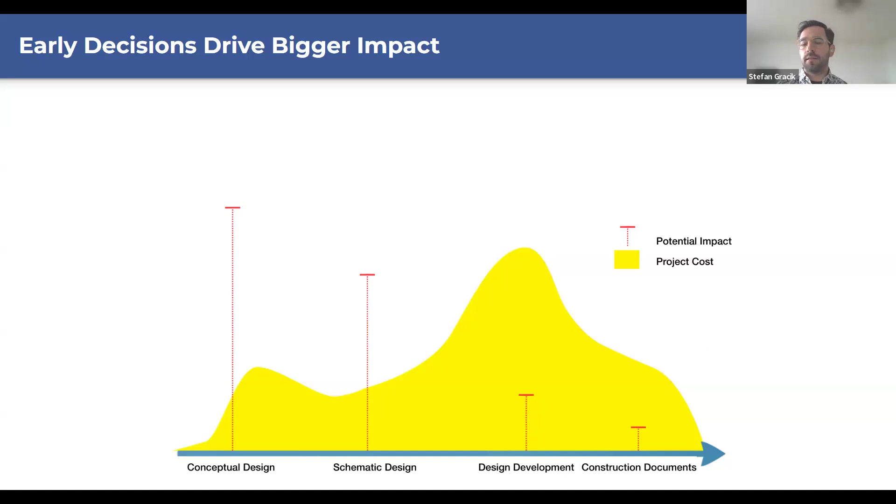Traditionally, a lot of people consider operational to be the part of the carbon sector that's mostly associated with the building, and you can offset that with solar, PV and low energy systems, but it's actually a lot bigger than that. A lot of the carbon that goes into a building is already in the atmosphere before the building's even operating, because of the material production, transportation to the site, and construction process. So at day zero of a building, you've already accounted for the majority of the carbon that goes into it, before it's even operating.

So it's really important to make sure we're accounting for everything and not just this tiny operational scope. Other things teams should be considering, in addition to the operating, are the facade, the structure, the actual materials used in the HVAC system, the size of the PV and battery systems. Also, the lifetime of the components being used is pretty important, because every time you have to maintain and replace equipment, that's more carbon being used for the building.

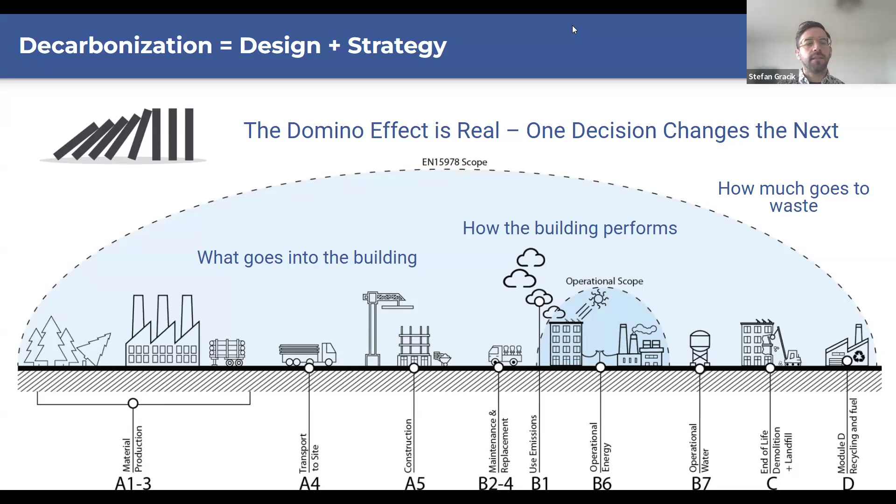Building up strategy and the design progress - getting back to this idea of thinking in a bigger picture about where all the carbon in our buildings is coming from, and also making sure we're trying to think about it earlier in the project, so we have more ability to design these projects the way we want to be.

Doug, I don't know if you have anything to say about how we're trying to push solar and energy storage into earlier parts of design and not just slapping it on at the end in construction documents. I'll just say that it's not really a lesser thing - it's an important piece of the puzzle, and how you do it, where you do it, and how much you put in is the key strategy you've got to figure out. Earlier is better, of course.

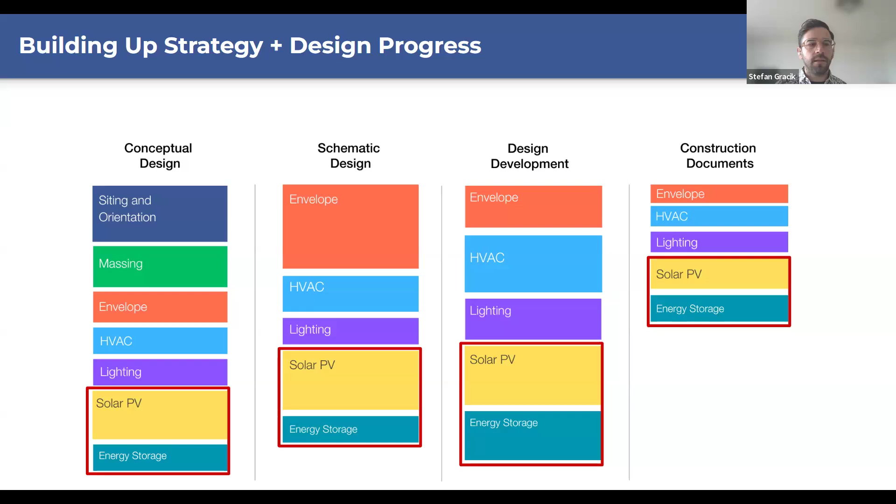Let me start off this slide by saying, let's back up one slide for illustrative purposes. What we want to make a point on here is that although there's a lot of traditional systems looked at in the conceptual design phase, solar PV and energy storage, at least in California and in many other places, is a reality, and it is no less a central part of a building design process than the HVAC system or the windows or anything else. It's a fundamental part of what the carbon strategy for the building will be. In addition, the energy platform you work from is going to drive many decisions down the road, but these are costly and complicated. So now let's go to the slide that I'm going to start on.

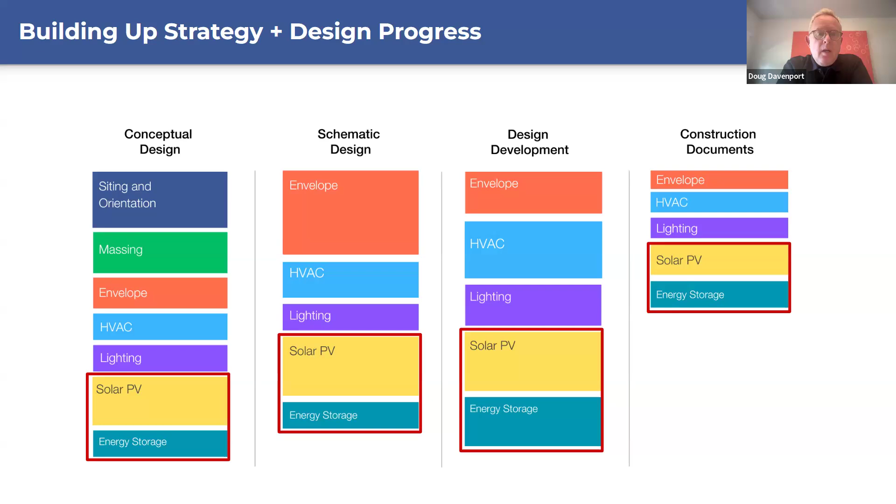Here's what we're recommending. I want to be really clear that we, as a team and as folks who've lived in this world for a long time, are not saying you should scrap your design process and forget everything you've learned. We're not saying what you're doing today is wrong, but we are saying you can take a different approach and achieve really great outcomes.

So things that we feel would be very important—I'm going to have a little discussion with my partners here as we move forward. In conceptual design, while you're looking at all those other systems, really at early stages, work with your client and then also with your project team to set ground rules or targets for embodied carbon and operational carbon. This may lead back to an internal standard, or it might lead to a building performance standard for the building once it's built. Setting all of those objectives up front becomes a frame for the rest of the project. Certainly setting ground rules for how you can employ modeling and other estimations to run through scenario analysis—we're going to be covering that in a second. Having clarity on what the goals are with respect to carbon is incredibly important.

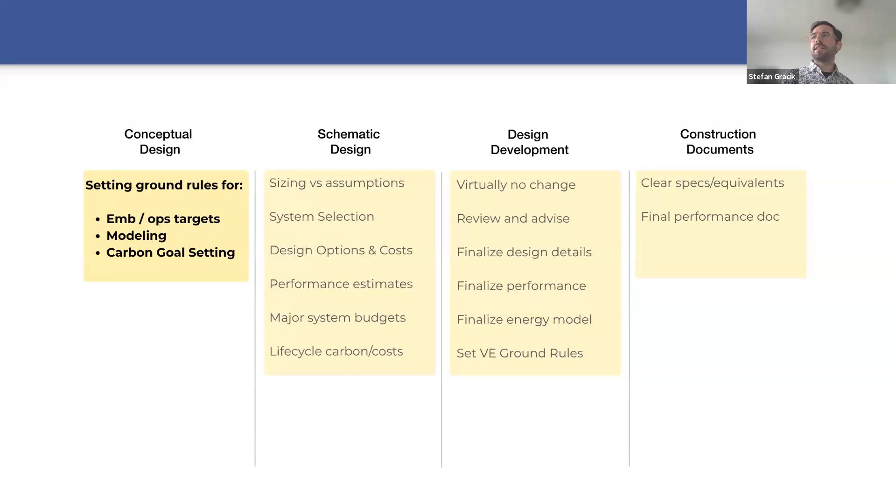Shannon and Stefan nailed it, I think. Starting early on, thinking holistically about decarbonization at the beginning of the project, and setting those goals, is key.

Excellent. Yeah, so I mean your clients are going through a lot. We're seeing ownership go through a lot of challenges, especially with regards to things like building performance standards and other regulation.

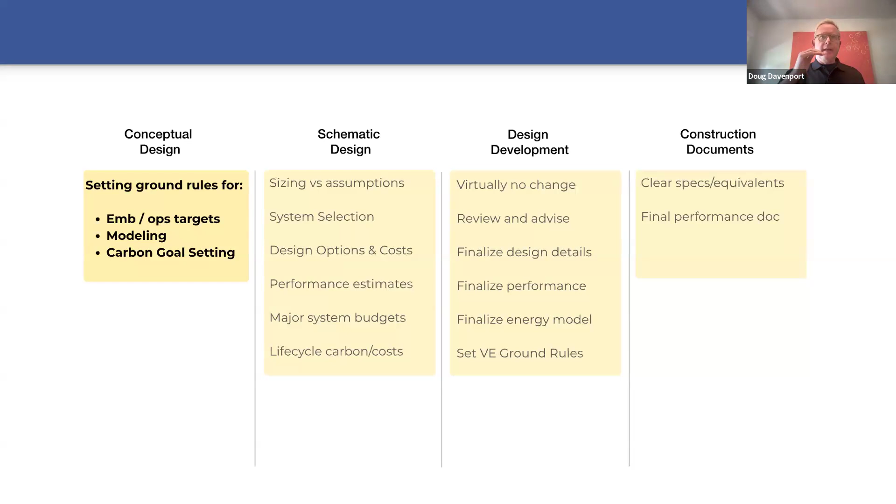But there's also the fact that, frankly, just now the economics of the sustainable choices become far more complex. It's best to get everybody out onto the table and figure out what direction you're going to be going.

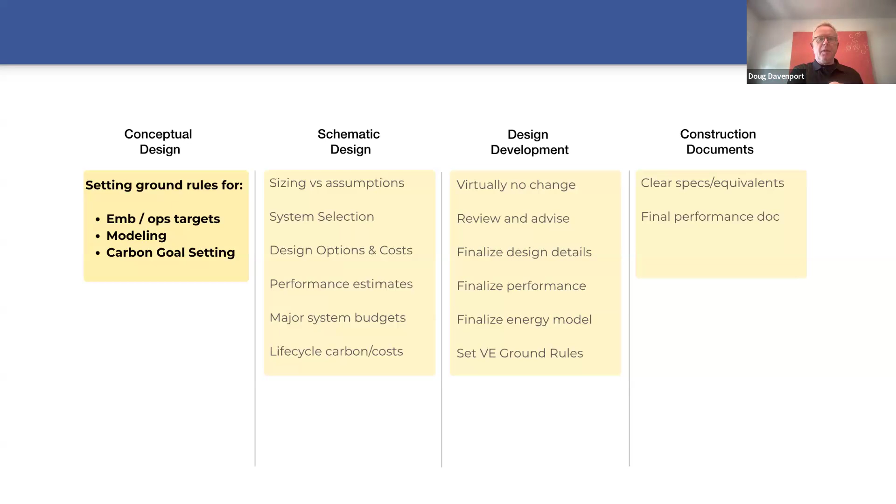So if we just go through these, and yes, you could read the faint versions. We're not trying to hide anything, but let's go to the next set real quick.

Based on what you know from the beginning, I'll also say, folks, that we're going to be going through a project where this was done and it did work very well. Now, because you've gone through and been able to get to the notional targets and options you should be considering, you can get into things like sizing, system selection, and major budgets, and start to tie together the building systems, their costs, possibly even their long-term costs, and then look at issues like life cycle carbon, especially with regard to embodied carbon.

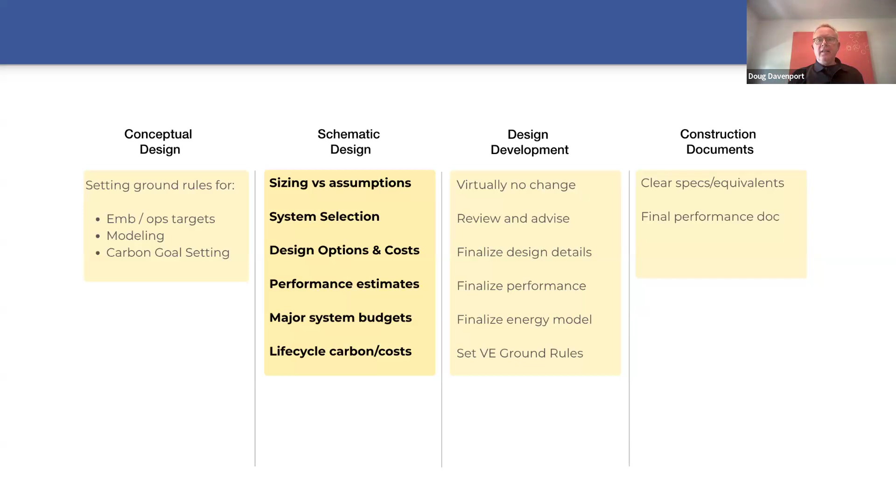Design development. Any comments from anybody from my partners on the schematic design? I think we've pretty much said it there, right? Yeah, okay, good. Design development, again, now it's starting to become much more like a building project that we all know and love.

Because we've now steered things in the direction that we feel it needs to go, now you're in classic design development with one thing we'd like to discuss real quick because it's really important, and that is we really encourage that there are ground rules, especially with your client, with the decision makers, with regards to value engineering before it goes out on the street.

I've been in this business for a very long time, so have my partners in this. I'm sure we all have stories of how a really great idea died an early death because value engineering took it out of the picture. This is a real problem when it comes to these kinds of projects, and we need to be extremely careful about that. We could do a whole webinar on why VE happens.

But I did want to open up to my partners. Are there any points you'd like to make about value engineering when it comes to projects like electrification and such? I think just like, sorry, go ahead, Shannon. Yeah, you can go first again.

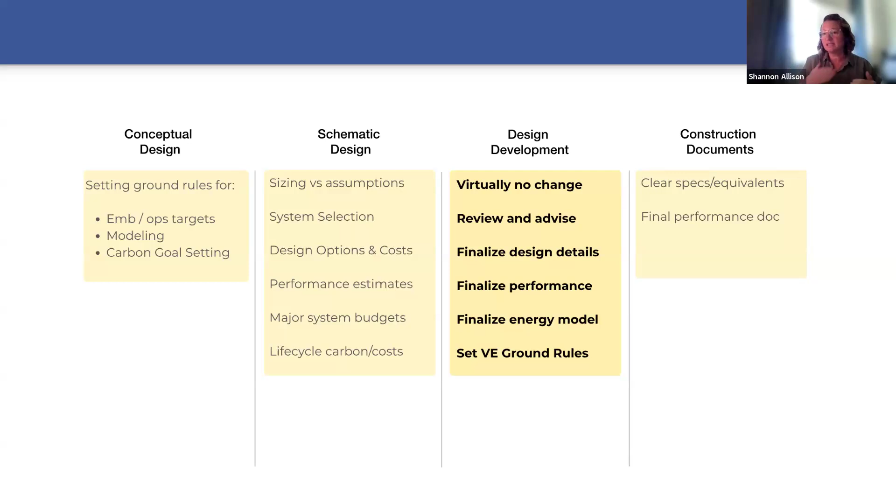I think thinking about the possibility of VE during the earlier phases is really important. And I've seen some architects, when they lead that process, they already have like a list that they're going to throw out there so that they can keep the things that they want in the project.

Go ahead, Stefan. Excellent. Yeah, I think this is why setting those targets in conceptual design is so important, because it kind of puts everybody on the same page about what the goal is for the project. And then when you start VEing, you can literally just analyze, okay, if we make this change, how does that affect things? Are we still going to meet our target?

And I've been on projects that did great through the VE process because we were able to analyze, oh, hey, this is actually a good cost savings measure. It doesn't kill our target, it saves some money, let's do it. And then another one is like, no, this is going to blow us out of the water energy-wise. So just making informed decisions is important.

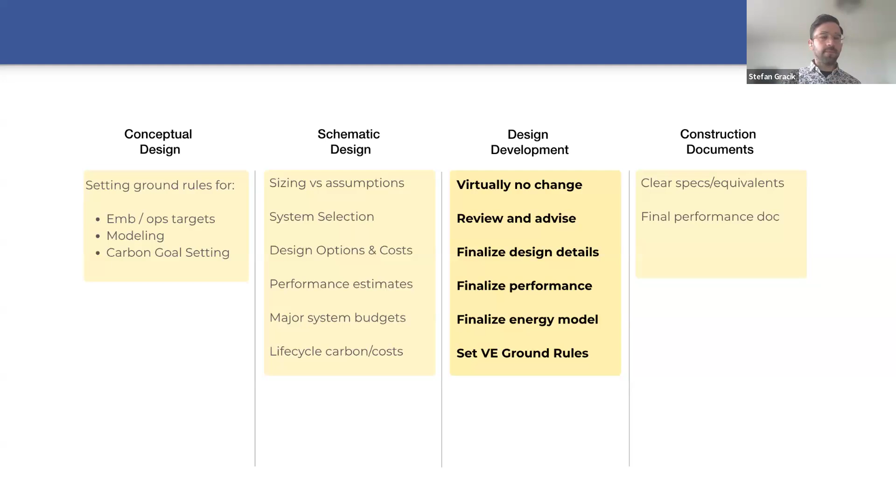Excellent. So in the interest of time, you get to construction documents. The whole goal here is everything you dreamed of in the beginning, and you set your aspirations toward, and you felt was the best idea, shows up here, right? That's the whole idea. And the next step is to make sure it actually shows up in the ground.

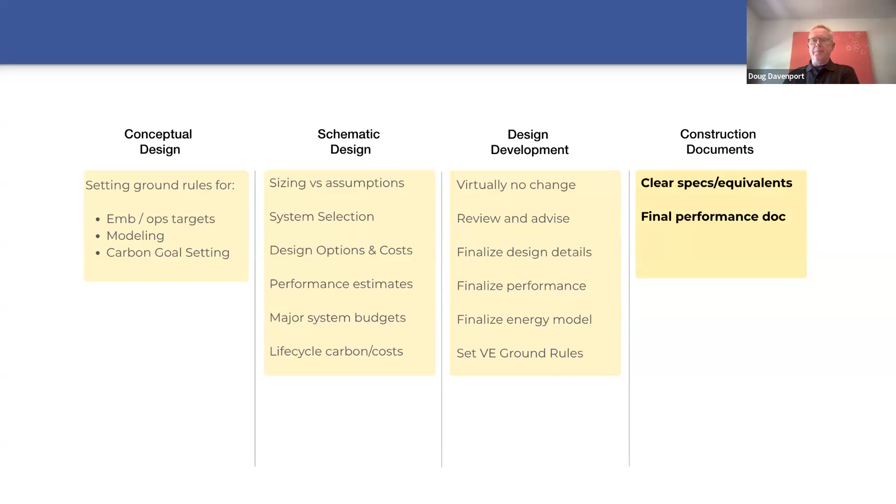Let's move forward, so keep that framework in mind. We are going to be bringing it back, and we will be referring to that as we move forward. Stefan, I think you've got the next section.

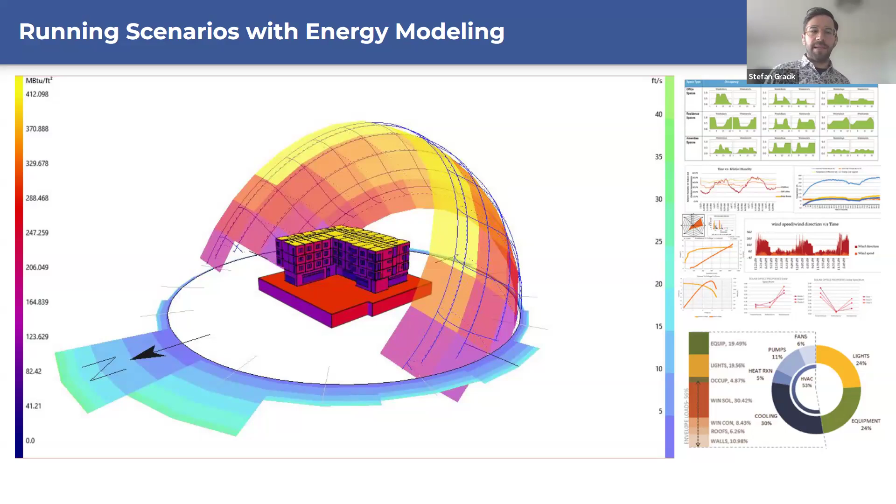But we can go to the next slide now.

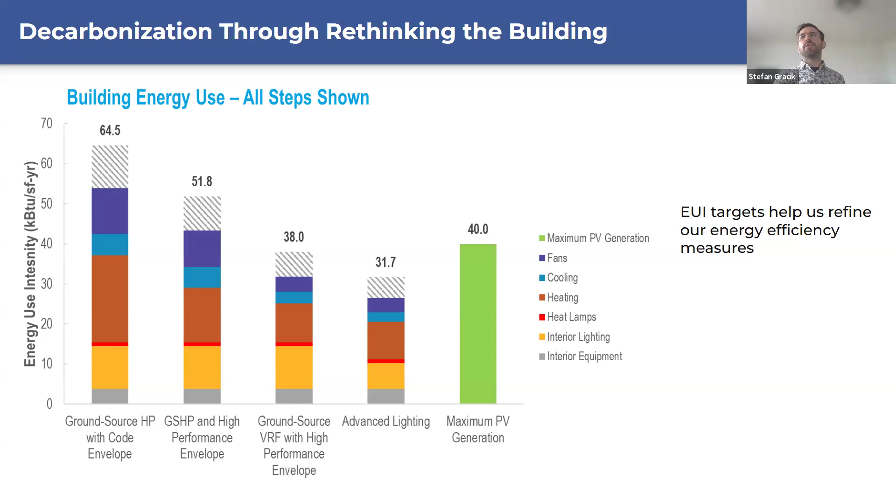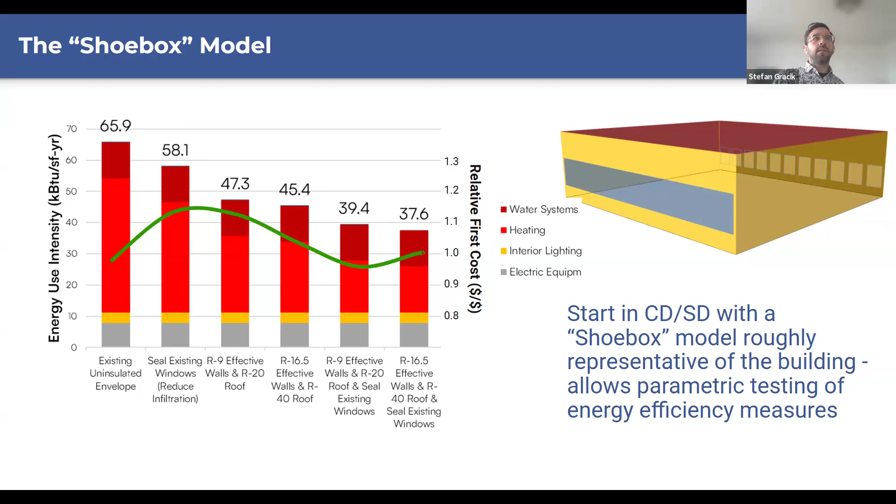So squeezing performance from existing buildings. I'm making a case for focusing on the envelope, especially in early buildings. The envelope has huge implications both for embodied carbon and for operational carbon. Part of the reason envelope is so powerful for embodied carbon is that if you have a better envelope, you can actually shrink your HVAC system, and HVAC systems have a lot of embodied carbon.

HVAC systems are made of metal, which is carbon intensive to build, and they have refrigerant with global warming potential that leaks out. So smaller systems, picking a system with less refrigerant, can be a great way to reduce embodied carbon. Envelope components also last longer compared to HVAC systems - putting more money into your envelope means it doesn't need replaced as often, assuming you're getting good stuff. So that's an improvement for life cycle carbon.

In coastal California, we have a great climate too. As you'll see in our Indio project, the envelope reduces the amount you need to use your HVAC system quite a bit, because there's a lot of natural ventilation and night flushing techniques that can be used to not even use your HVAC system. So focusing on envelope can pay off in dividends in many different ways, operationally and through embodied carbon.

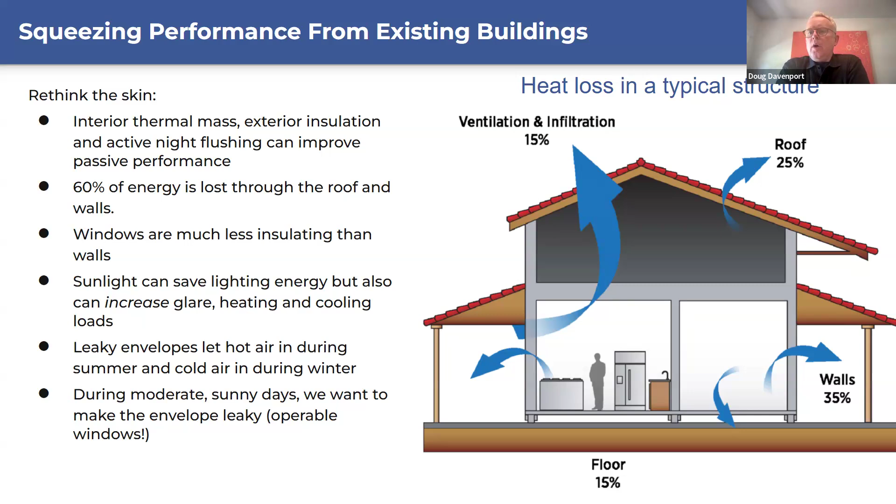Stefan, I wanted to interrupt because there was a question very topical to the slide just before, by one of our students, Charlie Boyd: Why with BIM and other known modeled assemblies does energy models still use simplified representative 3D models? I think what he's asking is, can't we do this better? But I think the point is you're trying to do it faster and get to smart strategies, not necessarily define the details. Yeah, exactly. That can be a really technical question too - we could do a whole hour on that question alone.

There's a lot of physics and heat transfer calculations happening in the background, and to make sense of a Revit model for those calculations would be very, very difficult. But there are people working on automating the simplification of a Revit model into an energy model. It's called Ladybug Tools - they have the best working one I've seen so far. They're letting the computer do the tracing of all the walls and automating that, so it's faster. But there's real technical limitations for why we can't just use a Revit model for an energy model - it just doesn't have the information we need.

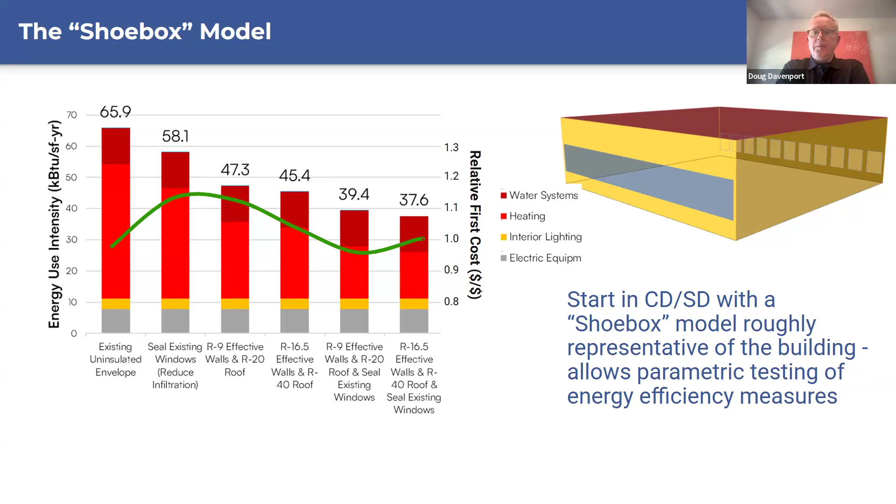Plus, it would be incredibly expensive and slow to get the very quick answers we're trying to get to at the conceptual stage. Yeah, also true. Okay, thank you. If you could skip forward. Sorry about that. Yeah, we can go to the next slide.

Charlie said too - here's a great example of other benefits of focusing on envelope, focusing on passive strategies when you're looking to make low carbon buildings. So buildings with poor envelopes are tough for the electric grid.

Both of these buildings were modeled to be zero net energy, so they have PV systems offsetting all the energy use in a year. But even with zero net energy, a code minimum building requires a lot more PV, so whenever PV is producing a lot it's way overproducing, and at night you're way underproducing because you don't have any renewables. So there's just a lot more peakiness happening, which makes the duck curve, as David will talk about later, a lot worse.

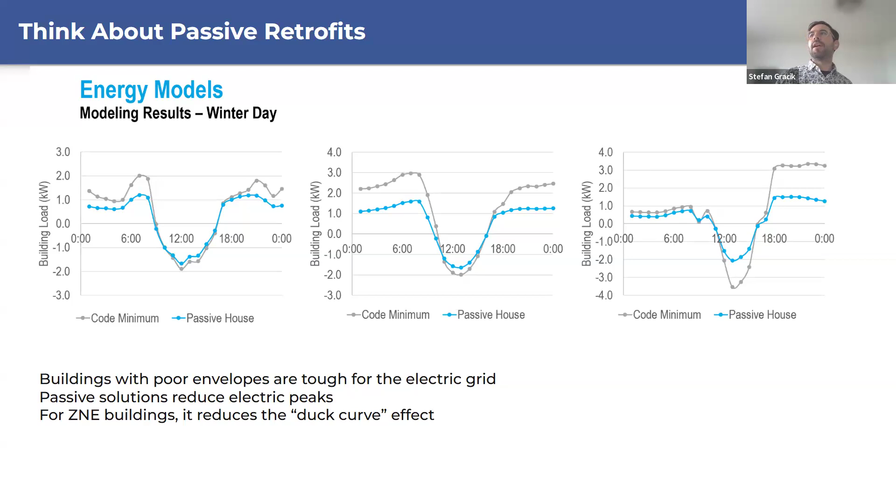So building more passive allows you to have lower peak demand on your building. It allows you to have a smaller PV battery system, which makes your electric use less peaky, which is great for the grid. It also allows you to have less embodied carbon, because PV battery systems have a pretty good amount of embodied carbon associated with them. We love them, but we want to make them smaller if we can, right?

Seeking out embodied carbon reductions. So embodied carbon is huge. This figure is from MEP 2040, the study they just came out with a couple months ago. On day zero, before your building's even operating, there's a ton of embodied carbon impacts on the building. MEP systems are already using 27% of embodied carbon on a typical building from day zero. So it's maybe a lot more than most people think of embodied carbon as a structural or envelope thing, but actually MEP systems with their metal and refrigerants use a lot of embodied carbon on day zero.

And then their embodied carbon increases quite a bit over time because they have things like equipment replacement and refrigerant leakage. So, 20 years into the building, the MEP system is now responsible for 53% of just the embodied carbon of the building.

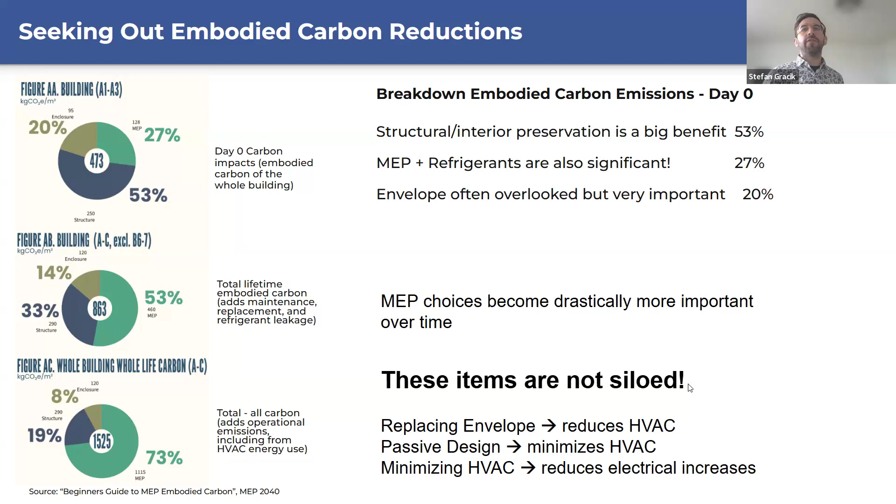And then when you consider the fact that HVAC systems are the highest energy using piece of a building, once you get to the entire whole building life cycle of carbon, including all embodied and all operational carbon, MEP systems can be said to account for 73% of a building's total carbon, right?

And the thing is, we don't always have to focus on MEP to reduce MEP, because having a better envelope reduces your HVAC size and reduces the amount it runs. So these things are all kind of linked together, which is why it's so important for us to look at the whole carbon picture as a team and not siloed.

And Stefan, we're going to have to kind of turbo the next two slides to get us into timing, because we want to have plenty of time for open discussion. Yeah, sorry about that. No worries, so much great stuff to talk about. We go to the next slide, Q. We're always ambitious when we do these sessions.

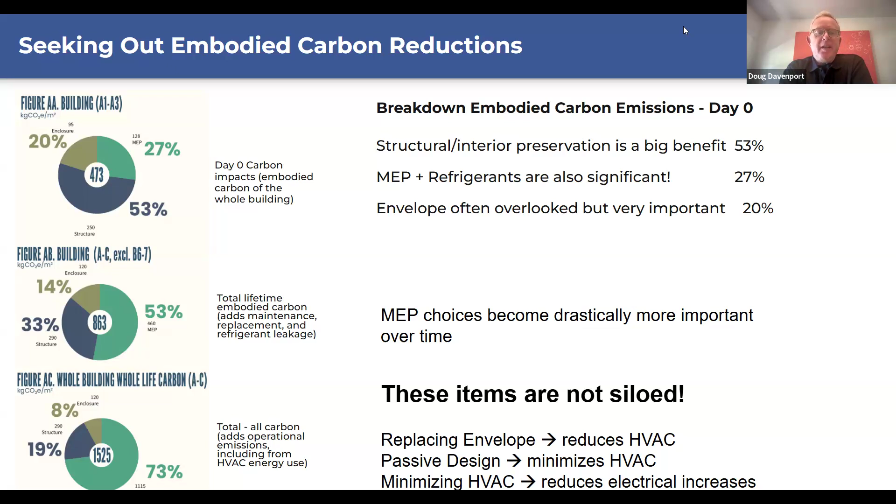So anyway, what do we recommend? Every client has their own capability. Some clients have all the money in the world and want to do everything they can, but some don't. And sometimes you go to a building and there's just genuine issues, like it's crazy uncomfortable because they don't have any insulation, they don't have an HVAC system, there's glare, they don't have enough electrical capacity to put in this new heat pump system they want, or something like that.

So I think every project that's a retrofit, and we're going to have a lot more retrofits than new buildings in the future to meet our carbon goals, should first diagnose the existing issues. Just walk through the building, figure out what's going on, because sometimes maybe they don't need a fancy new HVAC system. Maybe they just need their operable windows to work properly. Maybe they're stuck closed or something like that.

Second, reuse and adapt what is there. So before you go out and buy a bunch of fancy equipment, maybe consider making passive upgrades to the building, because a lot of times these cost trade-offs can be positive. It could be better to make a building work passively, especially in coastal California, than to go out and buy fancy new HVAC systems.

And then for what remains, once we get those first two underway, that's when we want to start eliminating natural gas, putting in all-electric HVAC systems, and getting in PV and battery systems.

And then for the clients that have the money, everybody's going to have to do this eventually, but we should do it in stages because those PV and battery systems and electric HVAC systems will be smaller for projects that have gone through the first two issues already.

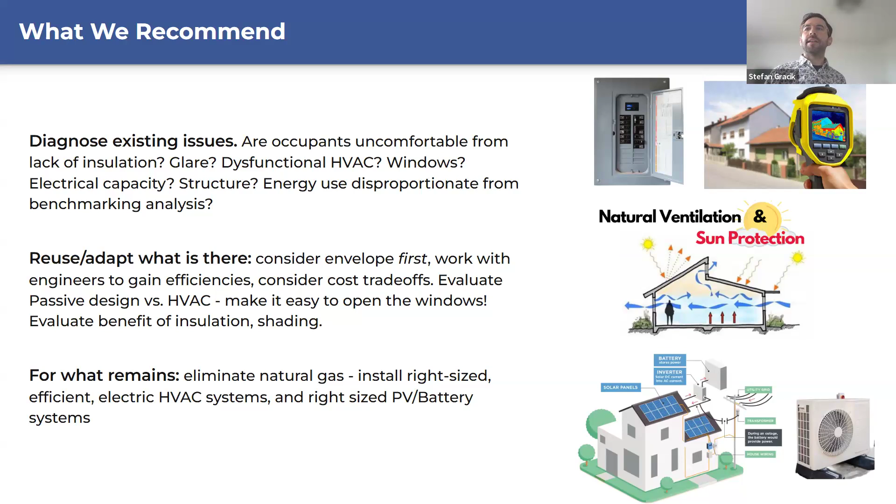So, to me, this was really exciting because an investment in envelope carried us further toward the goal than investing in air conditioning to essentially work against a bad envelope.

Exactly. And the economics are very appealing to the owner.

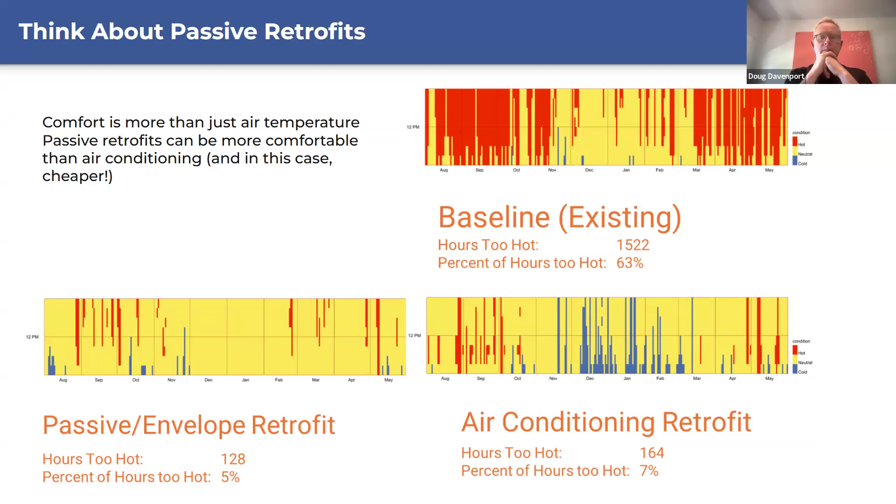So I'm going to talk about some of the issues on the electrical side. I think the first thing is, one of the key strategies if we're going to all-electric buildings using carbon-free electric energy, is storage is becoming a big thing.

The good news is that the cost of storage, similar to the cost of photovoltaics over the years, has been dropping. Years ago, I remember doing my first net zero project and PV was like $10 a watt installed. Now it's less than $2 a watt installed in a lot of cases. So batteries, because of EVs, are following that same curve and the cost is going down, which is key. Over time, they're getting more and more affordable.

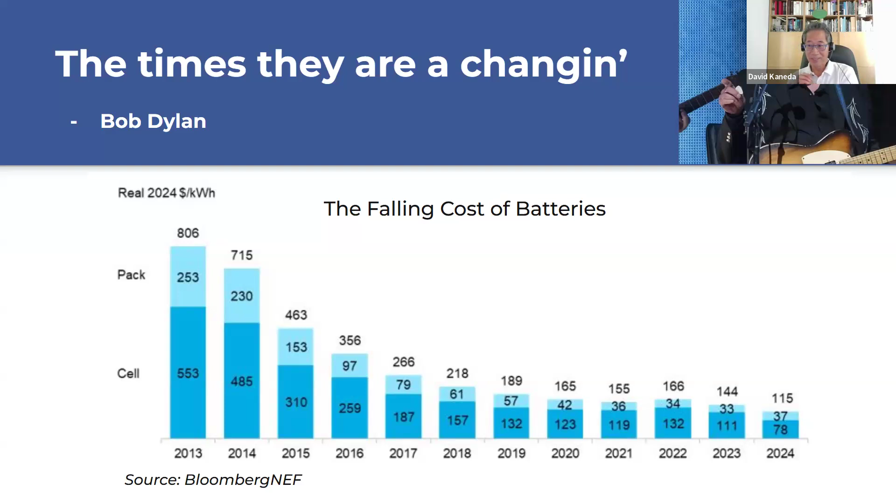A key thing I want to talk about is converting all your gas-fired equipment to electric - clothes dryers to heat pump clothes dryers, water heaters, gas cooktops to induction, and heat pump heating, eventually electric vehicles, and even potentially changing fireplaces to something like an ethanol fireplace.

There's actually an interesting fireplace somebody's making that uses steam to create something that looks like a flame.

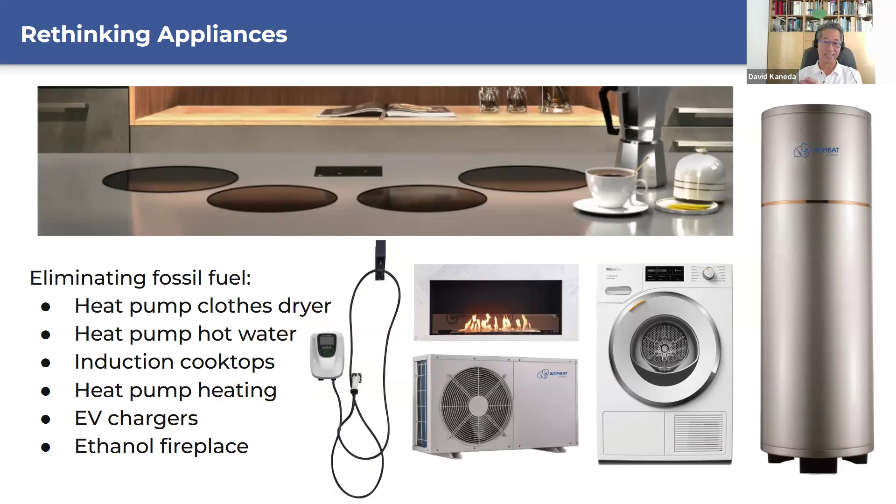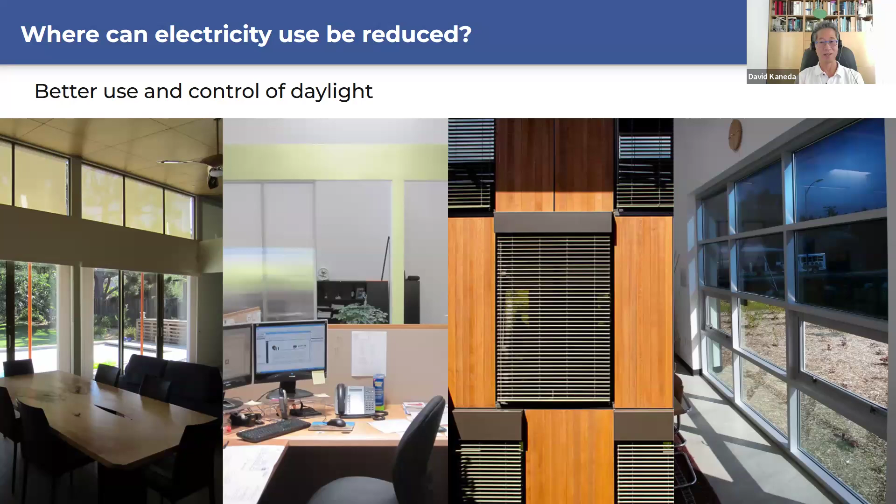A huge issue on the architectural side, underappreciated and not always done well, is daylighting. Architects have been aware of daylighting for years, but it actually takes a lot of expertise to do it well, and having a daylighting expert is important. You can save a lot of energy because you don't have to use electric lights during the day. But if done poorly, you could use more energy because you're overheating a building with more window area, creating a need for more electric heating in the winter.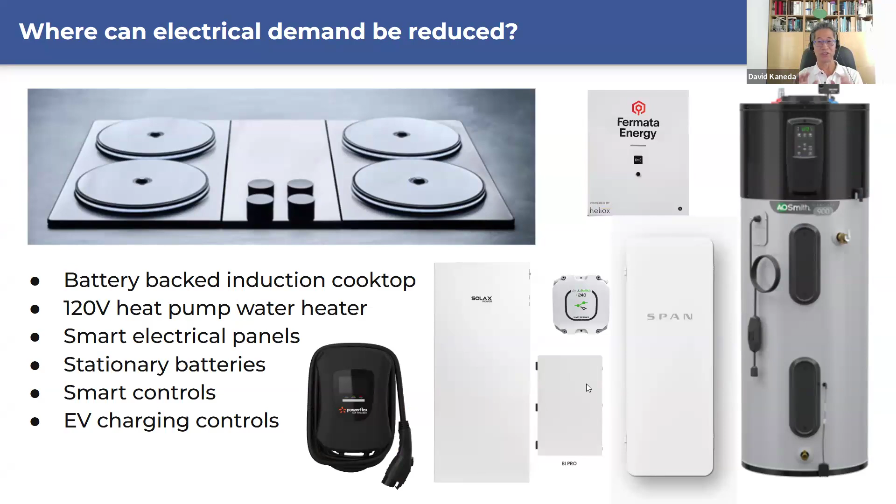Another issue is how do you reduce not the energy use, but the peak demand? Especially if you're electrifying existing buildings, you already have an incoming service, and as you start adding electric equipment to replace gas-fired equipment, the electric loads go up, and in a lot of cases you can overload your service.

Getting a new service often creates a time delay in the project. Sometimes you can't even get an increased service, and the other issue is that you need increased wire sizes and to rewire things. So there's starting to be a lot of really interesting equipment out there to help you put in this electric equipment without significantly increasing the demand in the building.

Some you may have heard of, like there's a couple companies making induction cooktops - typically you need a 40 or 60 amp breaker to feed them. But there's companies making induction cooktops you could plug into a 120 volt outlet and they work just fine. They do it by having batteries built in, so when you use more than one burner and the load goes up, the batteries kick in to supply the extra power, and when you're done cooking, the batteries recharge.

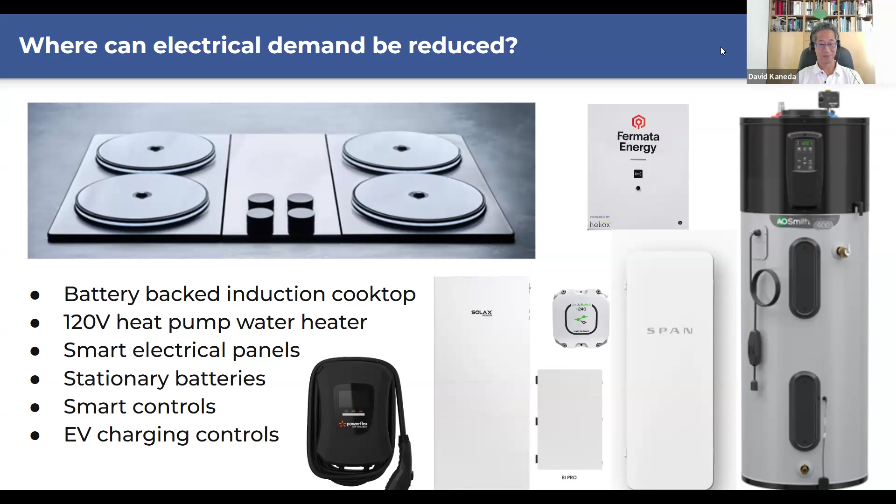That's an area to watch, and to have your engineers watch, is what's going on in those areas.

There's an interesting product that our team's been working with that takes heat pumps and does some smart things that probably we should have been doing all along, but haven't.

Think about a refrigerator - it's actually a type of heat pump, taking heat out of the inside and dumping it into your house. In the summer, you're taking heat out of the refrigerator, dumping it into your kitchen, then taking heat out of the kitchen with an air conditioner and dumping it outside. If you think about it, that's pretty wasteful because you're using two pieces of equipment to get the heat out.

What if you could just take it all the way out of the building in one go? Or better yet, what if you could take that heat out of the refrigerator and use it to make hot water? Right now, you're using one process and getting results of both cooling the refrigerator and creating hot water.

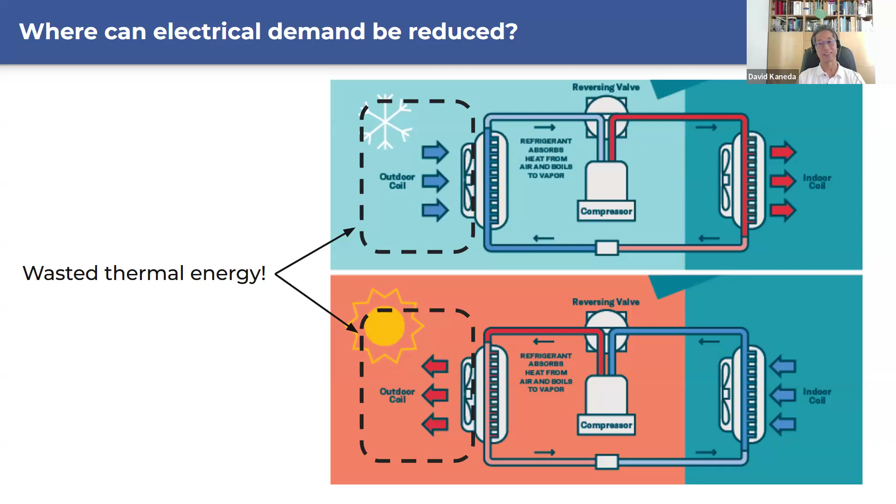I'll just mention that Flow Environmental Systems is a partner of Prospect Silicon Valley, and David is part of these projects and closely tied to our organization. We'll put a link in the chat to two really important demonstration projects we're using with Flow, with a single heat pump providing hot water heating and cooling, hydronic cooling. It's really cool, we'll put that in the chat.

I think most people have heard this - it was in the news last year that California reached 100% renewable energy for 132 days. So I think lots of people are starting to think we have plenty of renewable energy, we're in good shape, we're well along the way, right? And that seems to make sense, right?

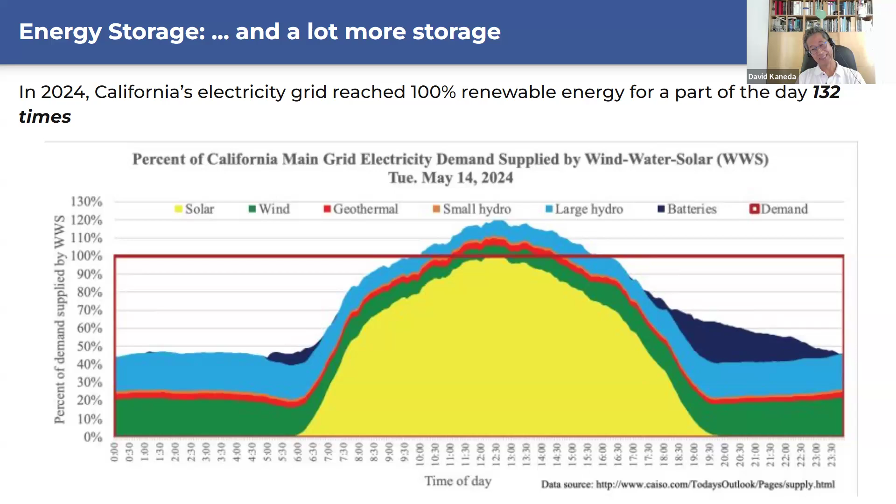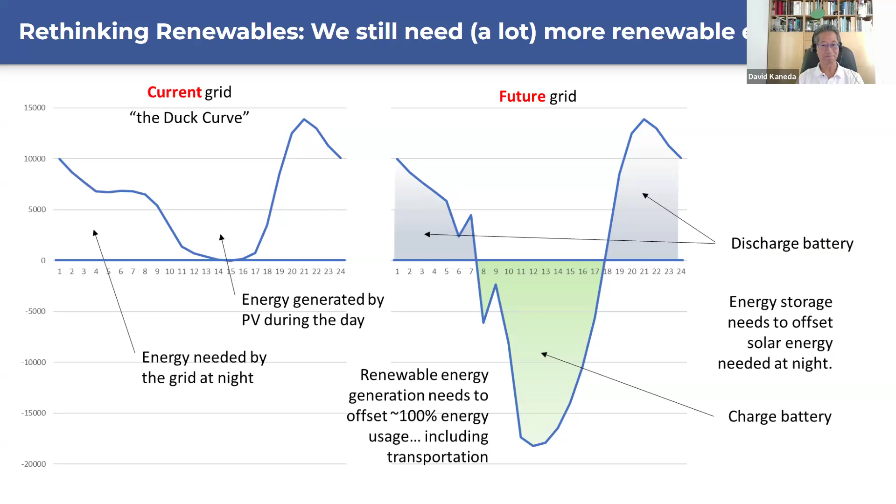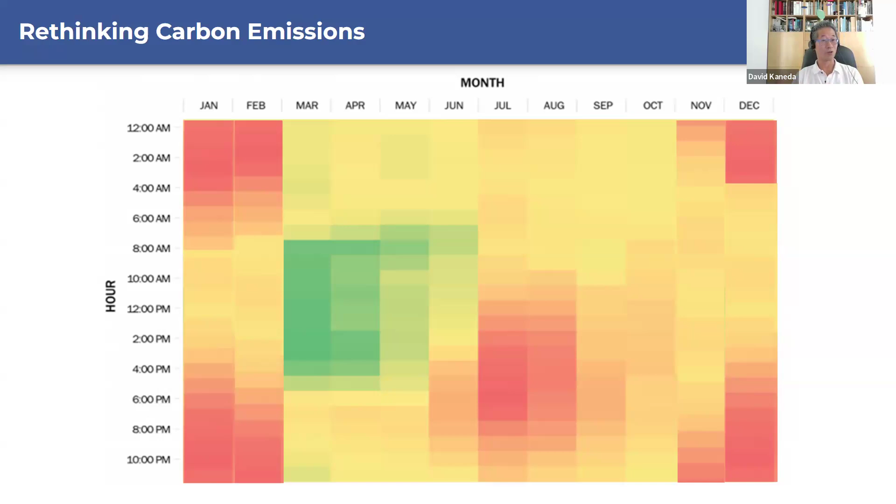So that's something, at least for our whole industry, to be considering. How do we solve that problem? Next slide.

So one thing I think we're looking at is putting PV on buildings and batteries in buildings. It's becoming a code requirement, and I think the requirements will become more stringent over time. Next slide.

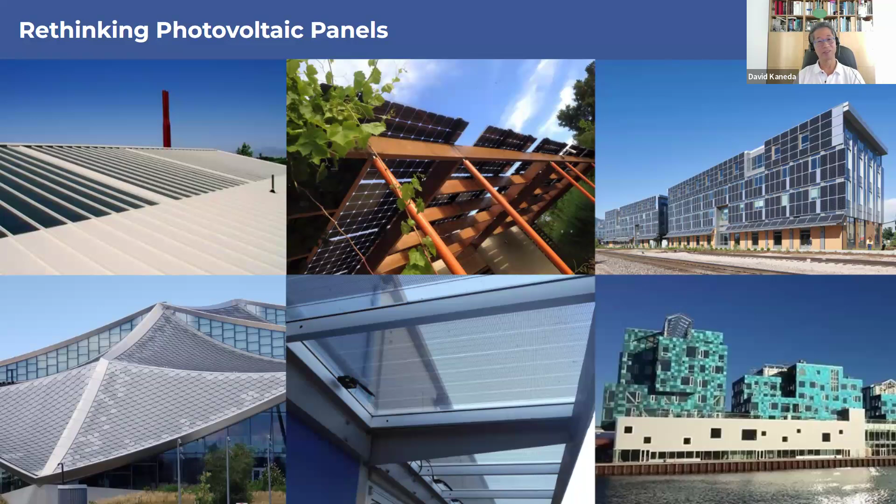So the good news for architects is there's a lot of different ways that photovoltaics can be incorporated into buildings, so you can get very creative with them, both in the roof and on top of buildings, but also even in facades. And it's been done both in the US and in Europe.

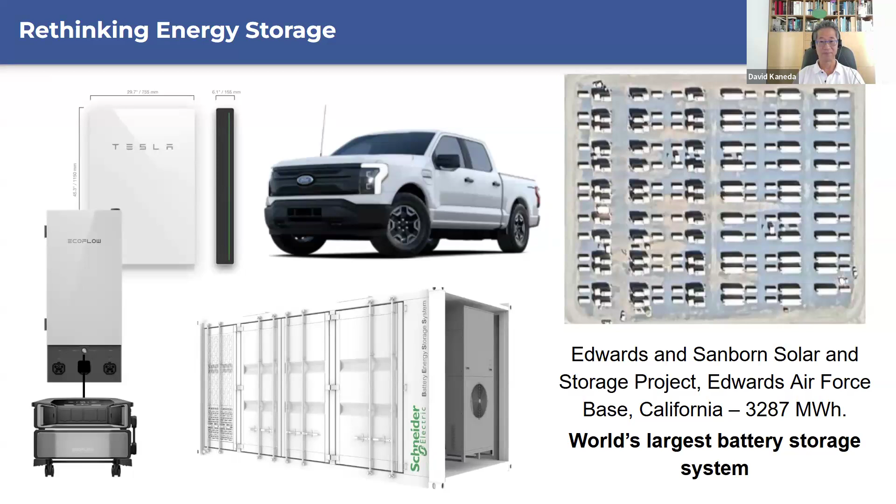And then, next slide. We're already starting to see large batteries being installed in buildings. So this is a project I worked on recently that had 1.4 megawatts of PV, but interestingly enough, it also had 2.5 megawatts and 5.3 megawatt hours of batteries, to create a microgrid that this campus could use in case power went out, and also to support it to be able to store power and use it later on in the day. Next slide.

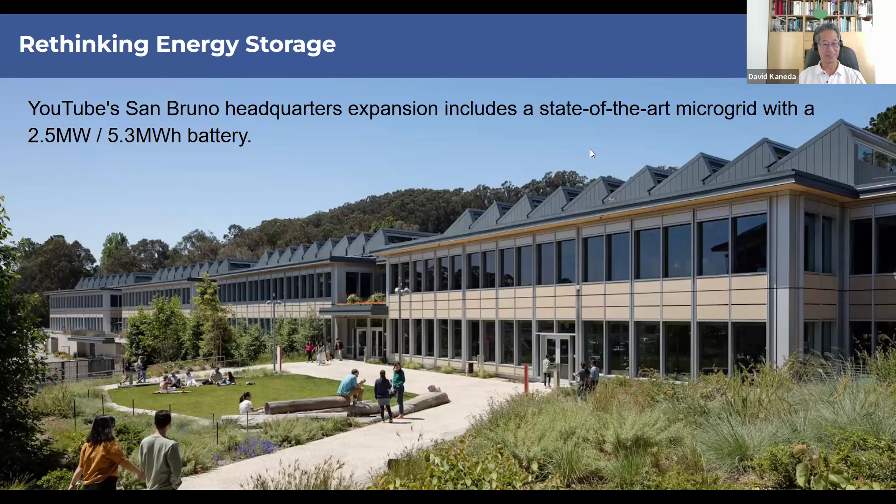Shannon, I think this is you, right? Yes, this is me. So I'm going to cover the 435 Indio Way project, which was previously mentioned.

About 10 years ago, at the firm that Dave, Stefan, and I previously worked at, we worked on this renovation project of a 30,000 square foot renovation of a 1970s concrete tilt-up single-story commercial office building, which is a common building type throughout the Bay Area and especially in the South Bay.

The building had uninsulated concrete walls, really thick concrete walls, concrete floor, wood roof, and single pane windows. The goal of the project was to see if we could renovate the building to be net zero on a developer budget. Our first task was to set the maximum energy budget based on the roof square footage. It could be site square footage too if you're going to put in overhangs, but we looked at iterations of that too for PV production and decided the roof was the best bang for the buck.

So then once we had our energy budget, we worked toward that budget by breaking it down into the different components, which you can see in these two charts here. And then you whittle down the different components where you can to try to hit that energy budget.

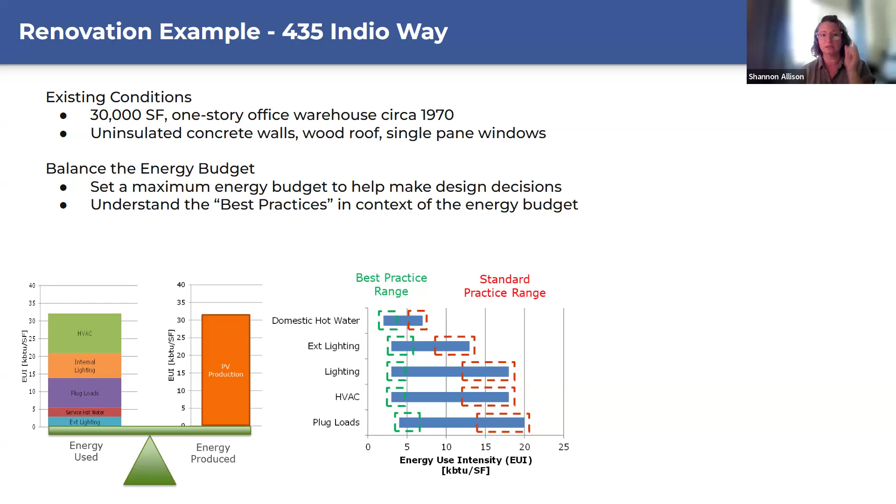And although this project was design-build, it was very much integrated design, starting from the pre-conceptual level, even when they were looking at which building to use. And so that brings us to the next slide, which is the overall design phase tasks shown here that we previously discussed. We did, even though this project at Indio Way was design-build, go through all of these tasks.

So I wanted to highlight here that the project delivery method shouldn't change when these tasks happen. It might be that a different team member is doing them, but they all ultimately do happen.

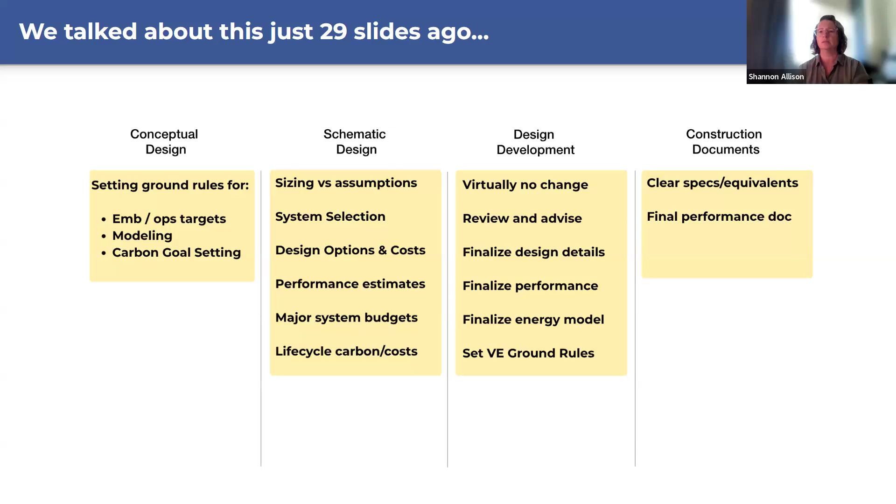Doug, did we want to say anything? Anybody else want to say anything about this one? We just wanted to bring this back so you recall what we said not too long ago about the strategy we're recommending you employ, because we're about to tell you how that strategy was employed and what it did.

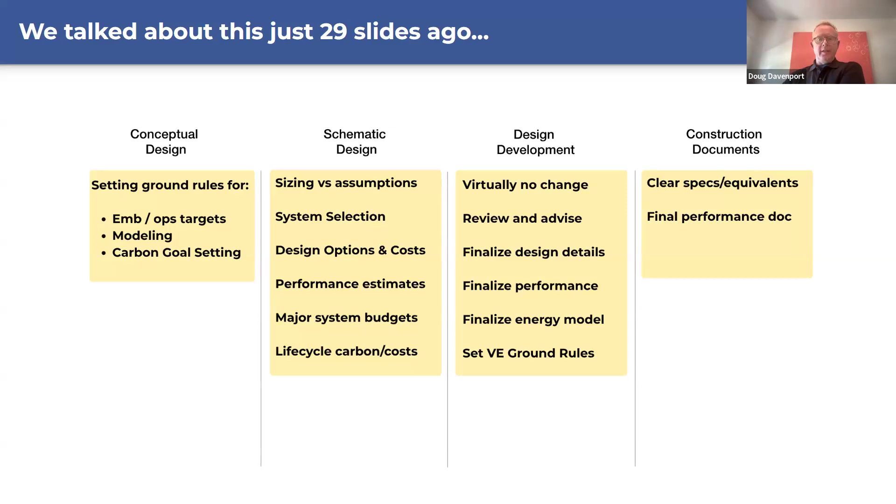So going back to the Indio example, we first focused on the building envelope. Here's an example table we used for tracking the modeling inputs for the envelope and the interior loads.

Hill House Construction was the GC, and they did cost exercises on a few different envelope options throughout the conceptual and schematic phases. Each option had to hit a max AC tonnage, which ended up being around 30 tons for that 30,000 square foot building. That proved to be more than what was needed, because that project was replicable, and that was part of the goal—to create something replicable, since there are so many of those building types.

We also needed to bring down the daytime lighting loads, so we added numerous skylights to bring daylight into the dark internal space, since it's pretty much a square shape with no existing skylights at all. Part of that energy budget was the lighting power density, and we were able to bring that down during the day by putting in all those skylights.

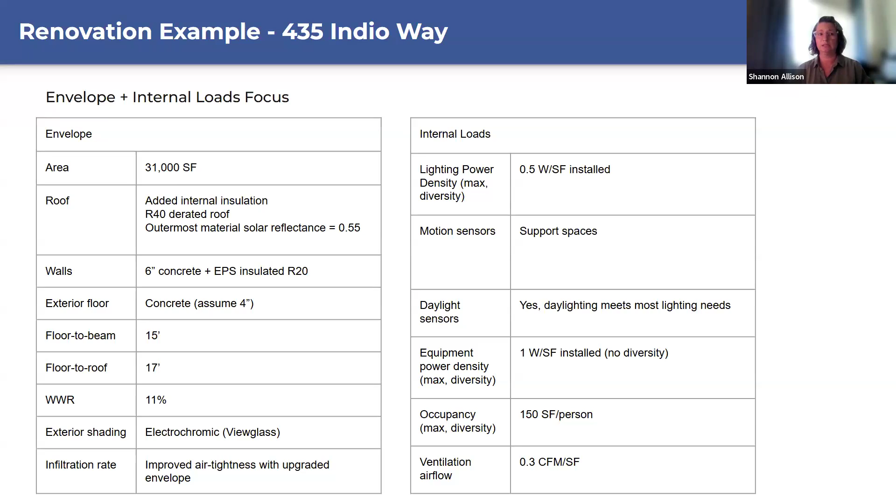When we looked at the annual energy use in our model—going back to something Stefan noted about the building envelope—being able to reduce your overall air conditioning tonnage or system size. When you upgrade the building envelope and employ passive strategies, you're also able to easily use an adaptive thermal comfort range strategy with your temperature set points, which also affects your annual energy use.

So here, we didn't enable the cooling until the space got to 78 degrees, and this proved effective as the space rarely reaches that temperature. That's due to leaving the thermal mass exposed—the concrete walls and concrete floor. On that project, we put continuous exterior insulation and left all that concrete exposed, which really reduced our annual cooling hours by a lot.

Once we had the envelope dialed in and the HVAC unit sizes selected, we were able to dial in the rooftop solar layout and production, then compare that against the final modeled building energy consumption. That iterative process between building energy consumption and production happened throughout all of the design phases from the very beginning, and we just fine-tuned it throughout, getting closer and closer to what we could model as what reality would likely be.

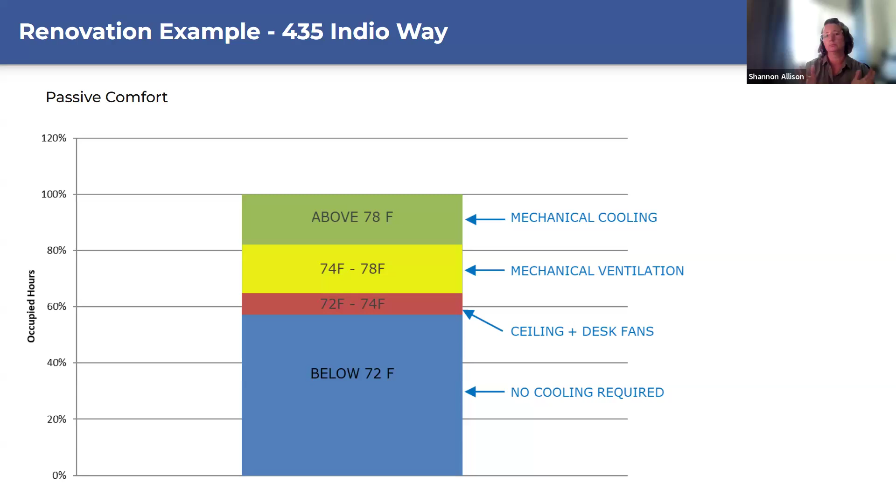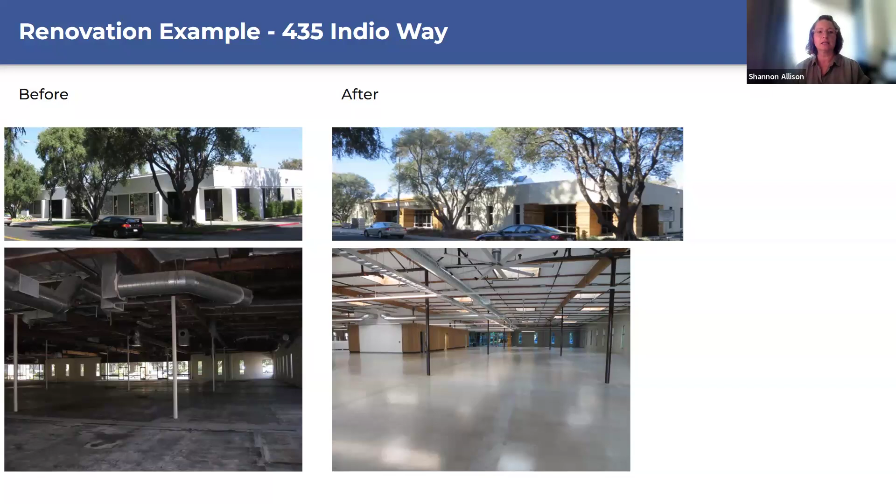I think a general takeaway for a building like this, if you're deciding whether to renovate to meet minimum code in the traditional manner versus doing a renovation of this nature—net zero energy with health and wellness aspects associated with it—what we've found is, as I mentioned before, we get about $3 back for every dollar invested in the sustainability measures. So it's more profitable for the ownership. That's been demonstrated and proven.

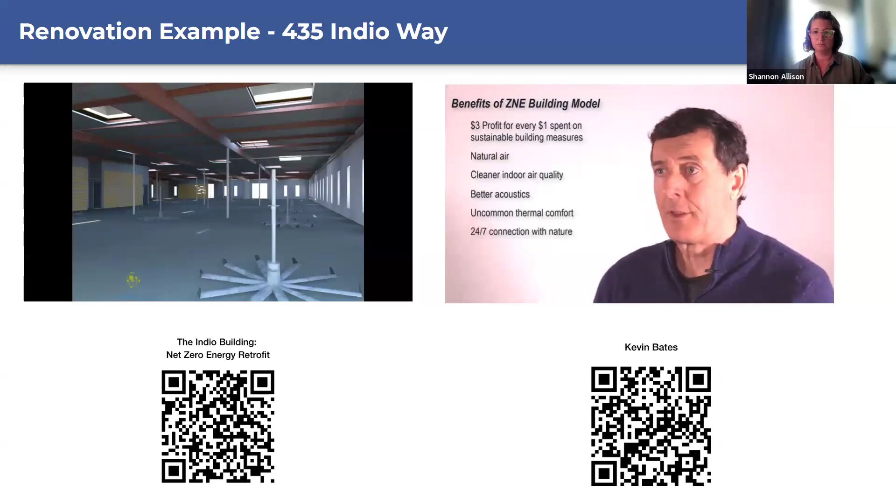We have natural air, much higher indoor air quality, much better acoustics, uncommon thermal comfort, connectivity with nature 24/7 for the occupants. So you've got a much healthier environment for the occupant. Healthier occupants—there are a lot of studies that demonstrate that means more profitability for the company.

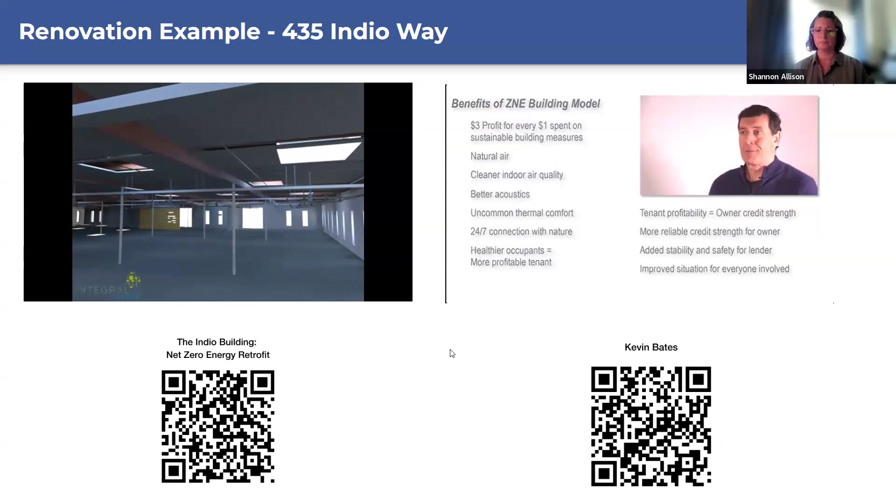So our tenant is more profitable, so my credit strength is more reliable than it used to be. The lender now has a more reliable building that, if it ever comes back to them, has lower operating costs and less carrying cost for them. So every angle I look at a building like this—whether it's from the ownership, from the tenant, from the lending community, from the occupants that are going to be in it—it's a better prospect. We really have a difficult time understanding why, if you can do it this way, you would ever choose to do it any other way.

So that wraps up the Indio Way project. I do want to say again that we did this project approach four times, and it worked great—we were able to fine tune the process each time. So really, when you're focusing on your approach to these projects, finding where you can replicate is really going to help you bring more of these home.

I think we should mention that was Kevin Bates from Sharp Development, who had been the driver of this Indio Way project. He was not only receptive to the kind of early strategic discussion and the weighing of values and setting of goals that Shannon went through, but has also gone on to be a really big champion of what you just heard—that this stuff isn't just a cost, and you don't just do it because it's the right thing to do. It can be very profitable, and the building can perform extremely well if you emphasize the right things and make the right investments. So I think that's great.